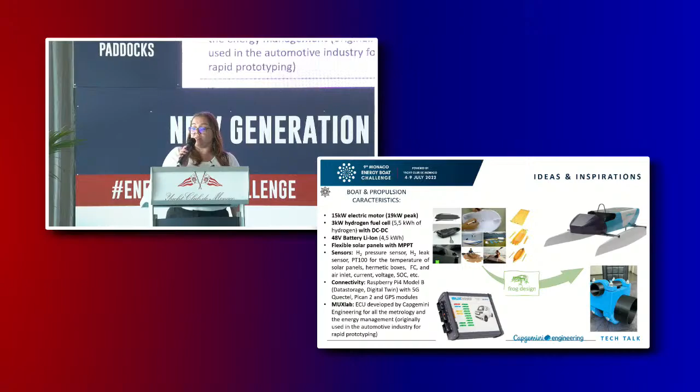So for our boat, it's the second participation like I said, so we have made some changes. The first is the electric motor - we now have 15 kilowatt electric motors homemade, and we have some lithium-ion batteries. And we have MuxLab, which is an innovative solution developed by Capgemini Engineering. The objective of this solution is to optimize the energy management of the boat and the different sources of energy, like solar panels, hydrogen fuel cells, and battery.

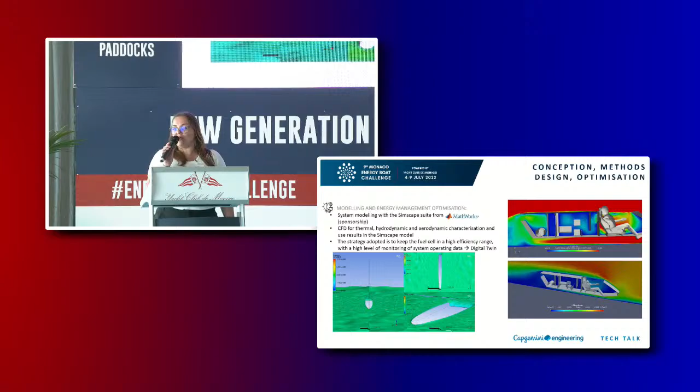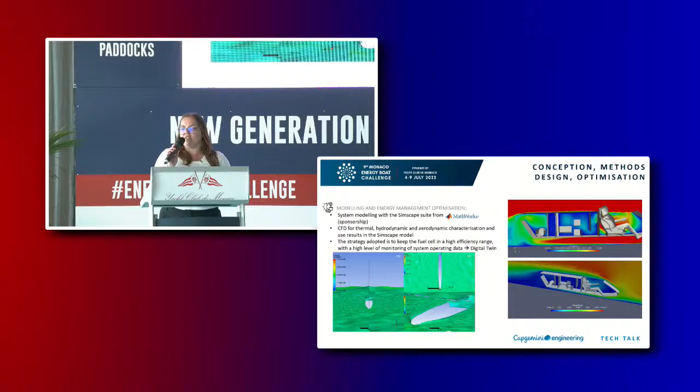So our conception is made with a base of tubular aluminum chassis, because the aluminum can be easily recyclable. And we have made some CFD thermal study to optimize the airflow for the hydrogen fuel cells. So thanks to a partnership with MathWorks, we have modeling system with the Simscape suite. And we have made a CFD for thermal, hydrodynamic, and aerodynamic characterization and used the results in the Simscape models. We have made a digital twin. The objective of this digital twin is to keep the fuel cell in a high efficiency range with a high level of monitoring of system operating data.

So about the material, it's the same as last year, but we have a change about the electric motor because it is an electric motor homemade. We have a hydrogen fuel cell like last years, and we have more lithium-ion battery. The new thing is a MuxLab computer because it is connected to a customized human machine interface and to a Raspberry. The frame is made of tubular aluminum for eco-conception, and we have covered our boat for protection against water splashes.

We have some problems with teleworking, which is difficult to work together at the same time. And we have a lot of problems about long delivery times for materials. Last year, our budget for the eco-conception of our boat was about 50,000 euros, and this year we have invested 20,000 euros for improvement of this boat.

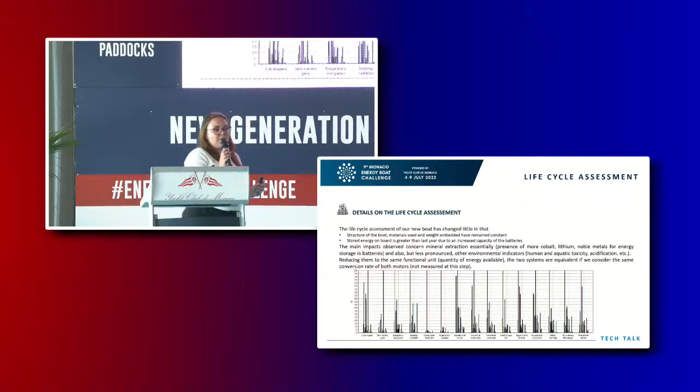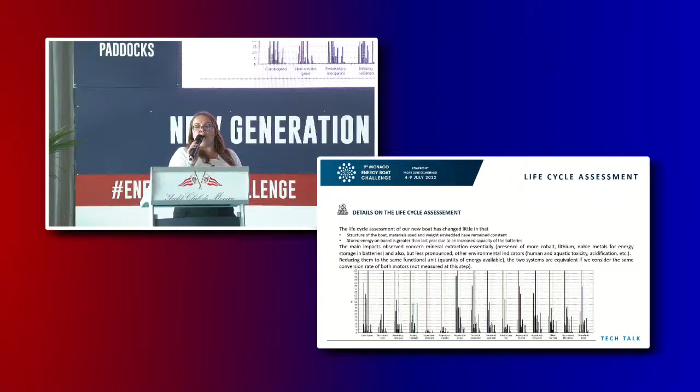So the difference from last year, there isn't much difference because we have the same setup. The change was mainly about the lithium-ion battery because we have more batteries than last year. So the main impact observed concerns mineral extraction essentially, but there are also some impacts on other environmental indicators.

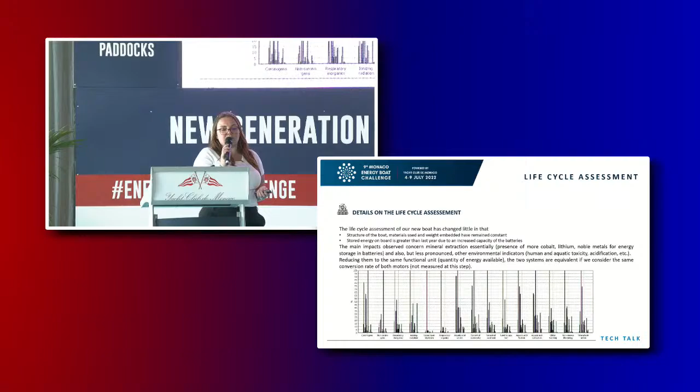So like I said, we have eco-conception and we use aluminium because aluminium can be recycled, and the tarpaulin is made of fully recyclable materials.

So one of our objectives is to develop a hydrogen propulsion chain in order to have a solution to offer our customers looking for technology to support the energy transition. Thank you for your attention.

Thank you so much. Allô, allô? Right, thank you so much. Do we have a question in the room? Ça marche pas. Please.

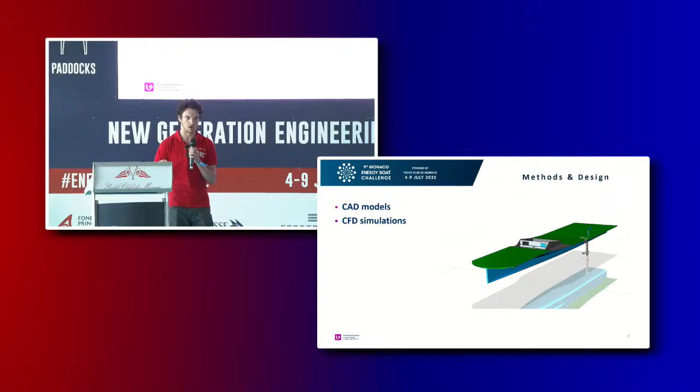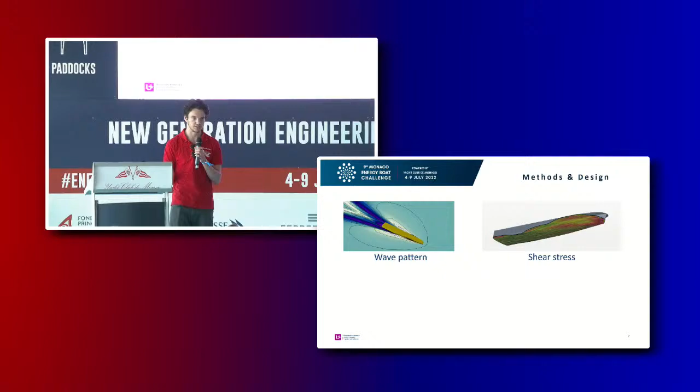Our methods and design are pretty straightforward. We make a CAD model, and then we do a CFD analysis on it to see how it would work in real life, and eventually we will test if it is the same as our simulations. In these simulations, we look at things like wave patterns, shear stress, hull pressure, and of course, we can make cool renders out of it.

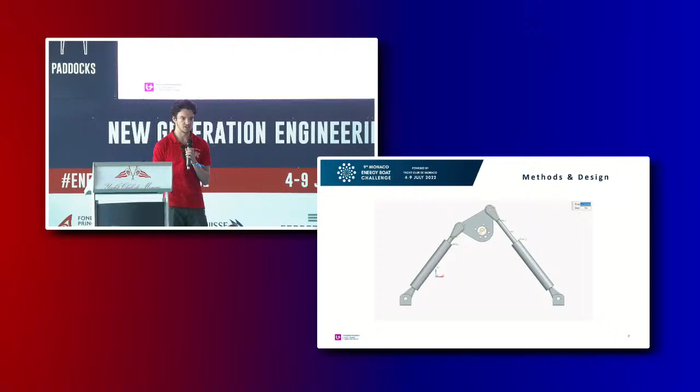Our new steering system was meant to be a hydraulic steering system, replacing our cable system because we had a lot of issues with it, with cables stretching and coming loose.

We try to make everything in-house, so our hull is made by vacuum bagging a carbon fiber composite made of a layer of carbon fiber, PVC foam, and another layer of carbon fiber. When this is finished, we take the boat out of the mold and trim the edges and finish it up. Eventually, we also made a deck with the same carbon fiber composites, which is removable, so we can work on the whole boat everywhere.

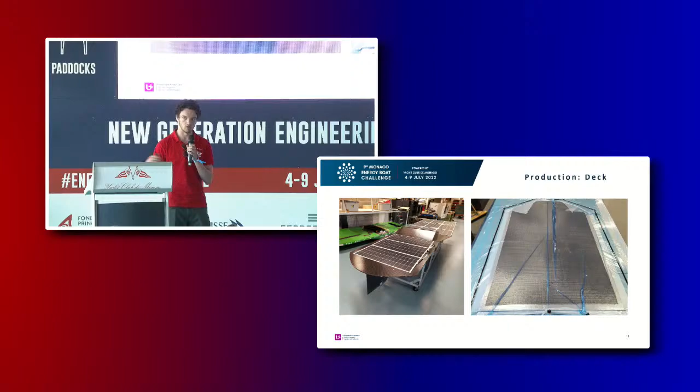Our driveline is also completely designed by ourselves. It's aluminium, special aerospace grade, so it can withstand salty seas and doesn't corrode very much. We have straight cut gears, which increases efficiency by 2%. It's a 2-to-1 ratio, so that means the 6,000 RPM motor reduces it down to 3,000 RPMs.

We have loads of different propellers which we produce in-house, each for different competitions like a sprint or endurance, so we're always at the maximum efficiency point.

Our solar panels are from Sunbeam. These are right at the maximum capacity of what's allowed, maximum area. So we have 1,440 watt peak. And these are way more efficient than our previous ones, with a solar efficiency of 24% instead of 16%.

We use a standard battery pack like everyone else with 1.5 kilowatt hours, and it's 50.4 volts.

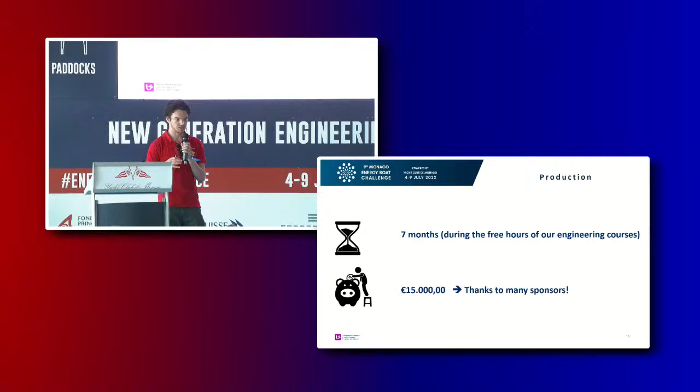This whole process of building the boat takes about 7 months, but because we also have our engineering courses, it takes almost 2 years. But the time we actually spent on it is about 7 months, and it costs around 15,000 euros to build a new boat, thanks to many sponsors who help us out, of course.

We also do stability tests. We check at different RPMs if it's also the same power you need to propel the boat, and also with different propellers if that's also the same. And then we do a trial like you would do here, with a slalom test and a sprint test.

For our life cycle assessment, we try to keep everything modular. So we have an old boat, and our complete battery pack, electronic pack, wiring loom, and drive frame are all swappable between them. So we don't need to produce a new battery pack if we produce a new boat. Also, our current battery pack is a reused battery pack from a solar car from another university, KU Leuven, who won with the solar car in Australia a few years ago.

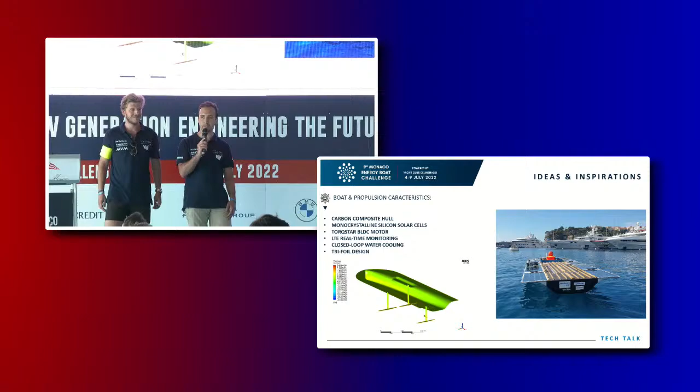To talk a little bit about the electrical side, we are using monocrystalline Solbian solar panels, around 6 square meters of them, and a Torqstar BLDC motor. We use LTE for real-time monitoring and telemetry, so we can actually view the status of the boat in real time from the shore and don't have to bother the pilot over radio to read in some data.

This year we had some new projects. First of all, we have our new propeller, designed with generative design. We had an initial model that we started with, then parameterized it, giving every aspect of the geometry. We made a simulation in CFD, then a response surface calculation, and optimized it. We repeated this cycle until we got the required result. This way we have different propellers for different races, for example a different one for the sprint and a different one for the endurance.

On the electrical side, our boat, unlike most of the other ones, doesn't yet have any CAN-based communication system on board or anything like that, and we really want to change that this year.

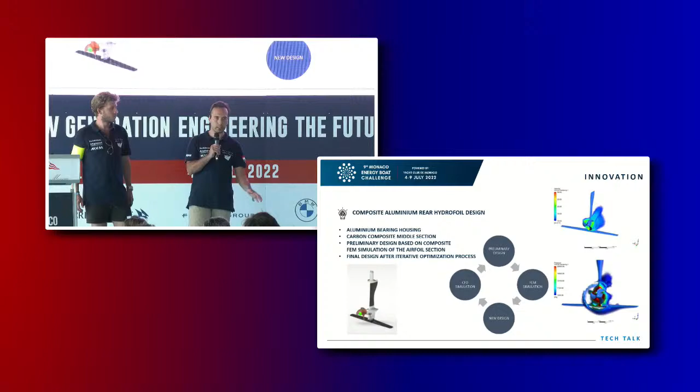The biggest project for us this year was our new rear hydrofoil design. It's a composite and aluminum hydrofoil. The cause of this design is simple: in Hungary, we are limited with some of our suppliers to manufacture it. So to speed up the milling process itself, we wanted to have something smaller to mill out. That's why it's split up into three main parts: an upper section, which connects to the boat and is milled out from aluminum completely; a middle airfoil section made of carbon fiber composites; and the lower section, because of the bearings and their tolerances, again from aluminum.

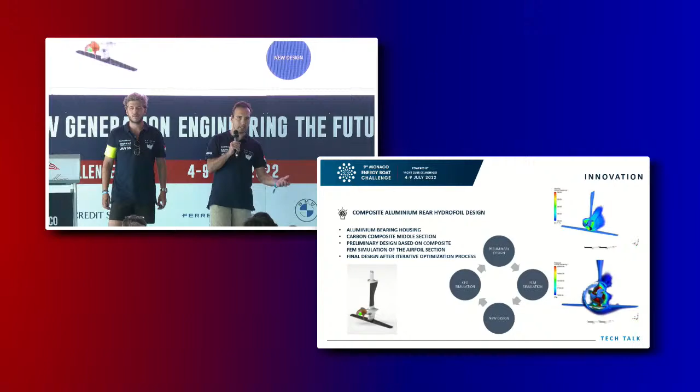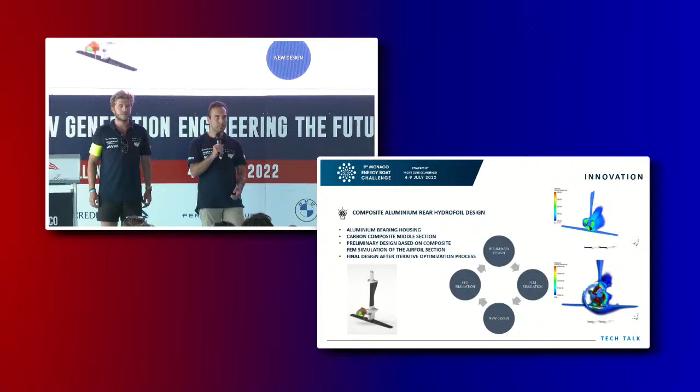To get to this solution, we made another iterative cycle. We made a preliminary design for the composite FEM simulation, then made a design for it again, then made another simulation in CFD, and then we evaluated the results. We repeated this cycle until we got the results we wanted.

Thank you for your attention. And if you've got any questions, feel free to ask.

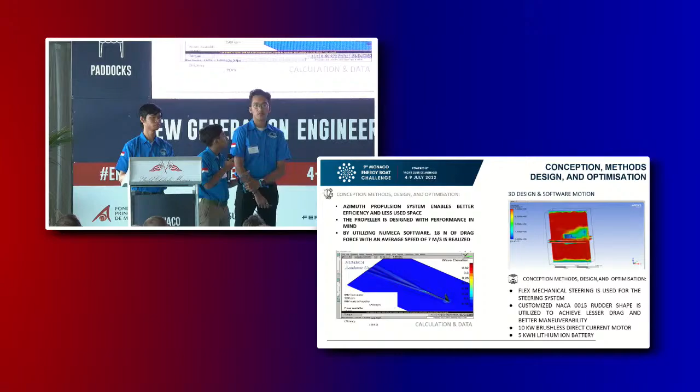Next is the conception and method for designing the mechanical system. Our boat uses the azimuth propulsion system with L-drive configuration, using a mechanical steering system because it's reliable and flexible. We use a customized NACA 0015 rudder to achieve lesser drag and better maneuverability at high speed. We use a 10 kilowatt brushless direct current motor and a 5 kilowatt-hour capacity lithium-ion battery.

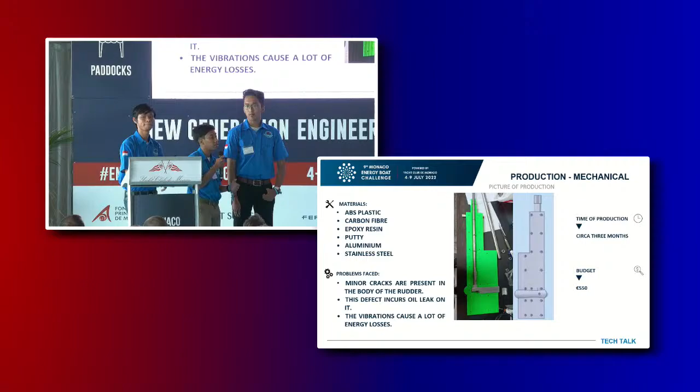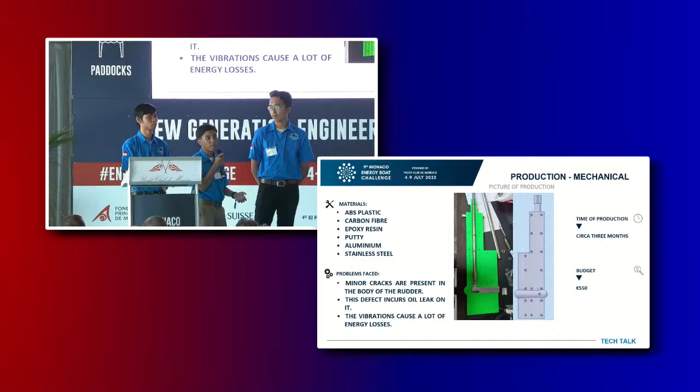This is the production part of the mechanical system. We use 3D printed ABS plastic, then cover it with composite materials such as carbon fiber, epoxy resin, and putty on the outside to smooth the surface. We use aluminum material for the tubing and housing, and for moving parts like gearing and the shaft, we use stainless steel. It took about 3 months to build this thruster with a budget of around 550 euros. The problem we face is that the reliability of the material isn't good enough to withstand the vibration of the ship.

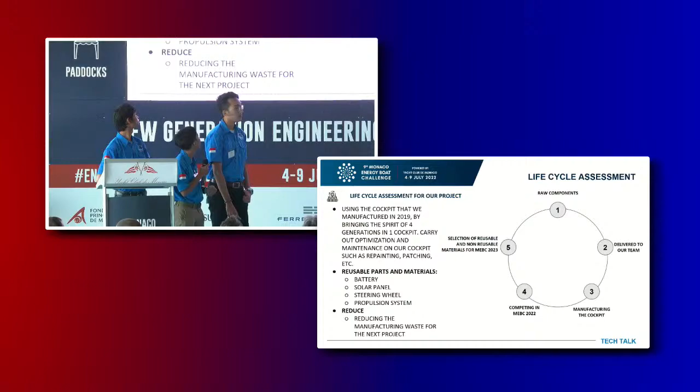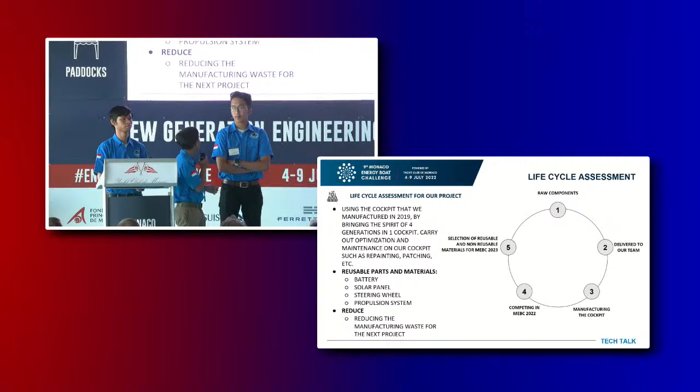And this is the life cycle assessment. So we manufactured the cockpit back in 2019. It means the cockpit has brought the 4th generation of Hydro Spirit. And then the reusable part of our boat is the battery, solar panel, and other materials.

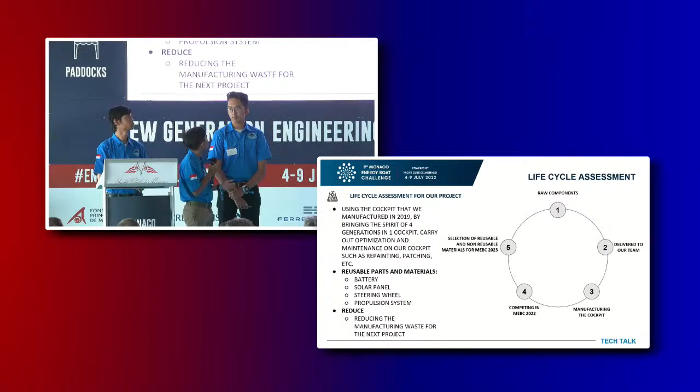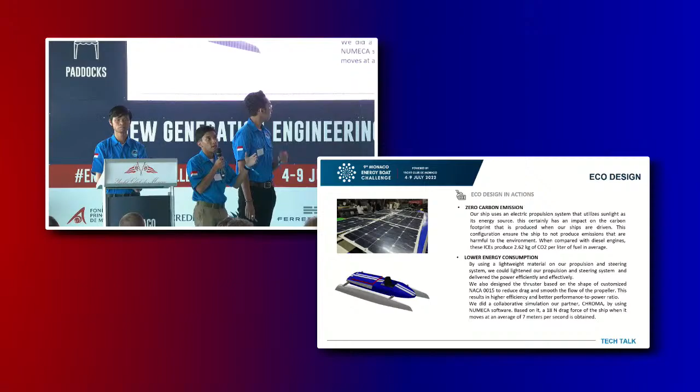When we compare to internal combustion, the internal combustion can produce about 2.62 kilogram of carbon dioxide. We achieve lower energy consumption by using lightweight material in the propulsion system and steering system, and because of that we can deliver the power to the propeller efficiently.

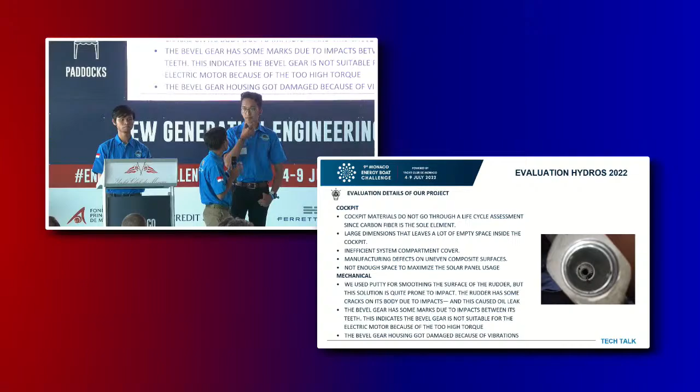And this is the evaluation for our next project. So the cockpit has no life cycle assessment, and the mechanical is unreliable material for the thruster.

All right, this is the next project for Hydros 2023. We want to make a cockpit based on the latest generation Formula E car and using biocomposite.

This is our next project. We want to use biocomposite such as flax fiber, but this is very challenging in Indonesia because there is no supplier for the biomaterial. For the mechanical itself, we would like to build our outboard system by ourselves using more reliable materials such as steel and aluminum.

Next, I want to share with Gavin. Okay, thank you for the handover, Rifki.

Currently, the electrical system of a boat consists of a couple of independent subsystems that require quite a lot of space, involve very complex wirings, and need a relatively comprehensive core system. Furthermore, a large amount of time, energy, and budget is mandatory to maintain, service, and operate the system locally.

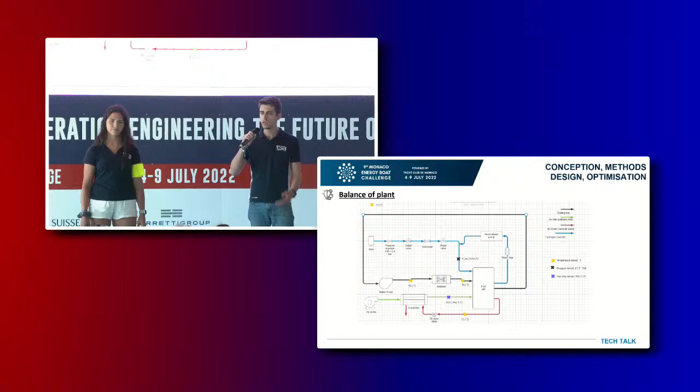This is our new balance of plant schematic. As you can see, there are new components, like there is a water trap and the humidifier. I will explain that later, but we have better results already with this new system.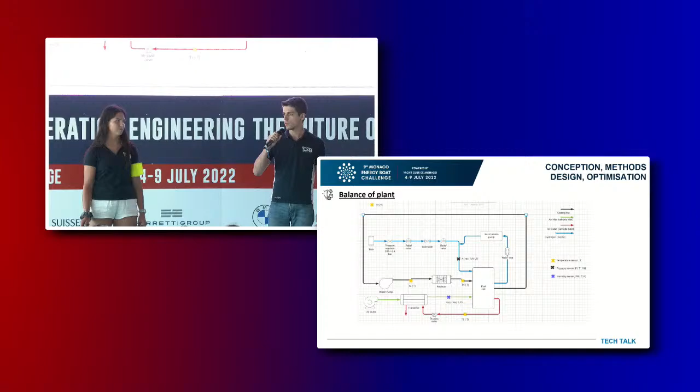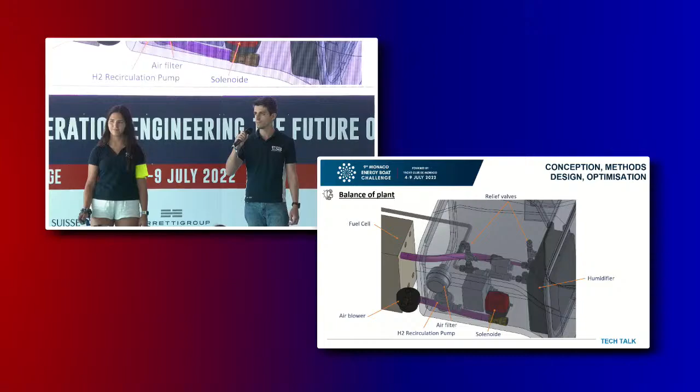So what is the purpose of the humidifier? As you know, a fuel cell's hydrogen admission has to have a humidity between 80 and 90%. So what we are using this humidifier for is using the exhaust of the air to humidify the inlet of the air. And why do we need humidity in the air inlet? Because we don't want the fuel cell to get dried out inside. Because if the membrane dries out, the efficiency decreases, and then the fuel cell overheats.

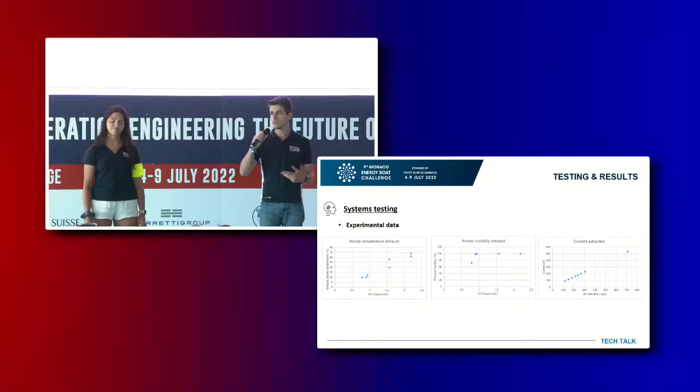Then, of course, we have to do a lot of testing. As you can see, we tested the new sensors, we tested the new radiator. We have some graphs. This was before we implemented the humidifier and the radiator, and you can see in the anode temperature exhaust, we pulled like 2 kilowatts of our 5 kilowatt fuel cell, and it was already overheating at 70 degrees. So now we expect to have better results.

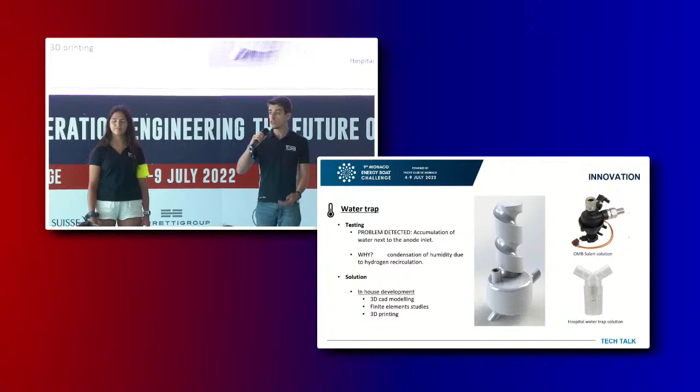So this is my favorite component, and why? Because this was all developed in-house. So I will tell you a story. As you know, most fuel cells need some kind of water trap solution because water condensates inside of the tubing.

But there are not many solutions for this. For example, we talked with a company called OMB Saleri, an Italian company. But they couldn't sponsor us because manufacturing the component for our system was very expensive. Then there are available commercial water traps, they are efficient and they do the job, but it's not an elegant solution.

So what we did, we designed our own system. In the vertical section of the structure, we have tubing passing through, and the objective of that tubing is to force the hydrogen to go a longer way so the condensation happens in that tubing. Then the water condensates, and because of the angle of the tubing, the water flows and goes to a reservoir.

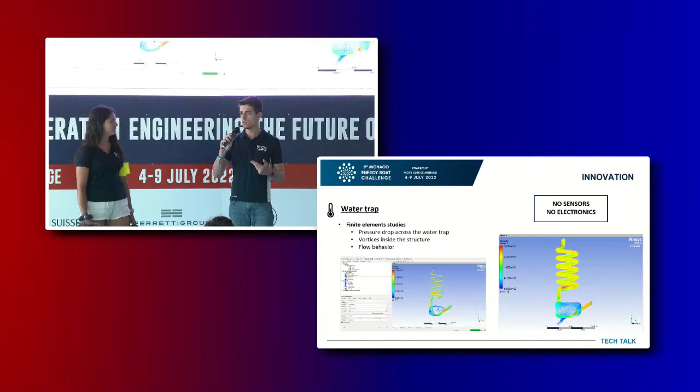And why this solution is so good, in my opinion, is it's a passive solution. There are no sensors. It's all based on our finite element studies, and I think it's a more efficient solution because there are no electronics, there is no power being used here. So it's a more efficient way of doing this type of control.

So one of the things I talked about is the problem of the water trap. In the industry, there aren't a lot of solutions. We talk a lot about the hydrogen economy, and there's a lot of funding for green hydrogen, but there isn't a lot of funding for the equipment that is needed for the applications. And that's what we are doing here.

Not only for the water trap, but for example, the humidifier. A humidifier costs around 1,300 euros. It's a lot of money for a single component. And this one was one of the difficulties of our team.

Now, regarding the life cycle assessment that we have always wanted to do to prove that our monocoque is really sustainable, we must do a comparison of what we have and what it would look like if it was made with carbon fiber and PVC core.

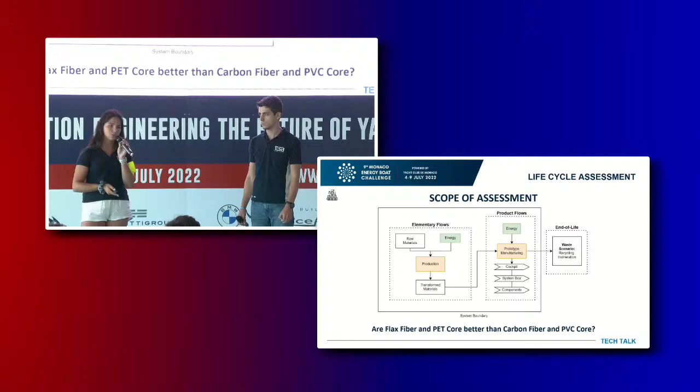While we were constructing the boats, we realized that flax fiber required twice the resin and twice the layers of fiber when compared to carbon fiber.

In this analysis, it was not taken into consideration that we used the bio-based resin from Sicomin, because in the database we couldn't find anything similar. Also, the reused mold from the Formula Student team was not taken into account here.

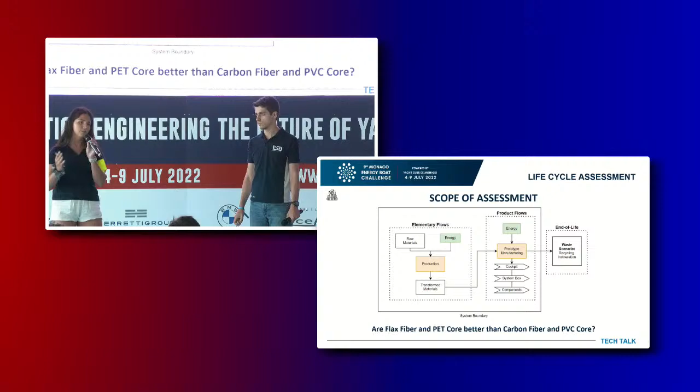We divided this into 3 parts: the system box, the cockpit, and the other components such as the seats and the headrest, for example.

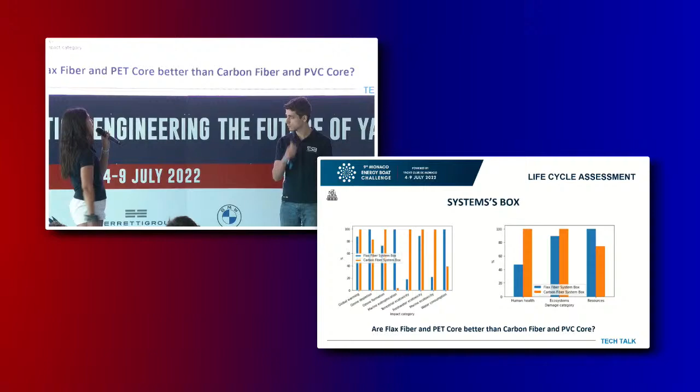So, are flax fiber and PET core sustainably better than carbon fiber and PVC core? Mostly, yes. Our biggest difficulty while doing this analysis was to find a database that had our specific materials.

We considered doing our own database, but it had a lot of complexity and data that we didn't have. So we tried to find one and make approximations to have the best analysis we could.

But we concluded that, yes, we did it — we achieved our goal to have a completely eco-friendly boat. Thank you so much for your attention.

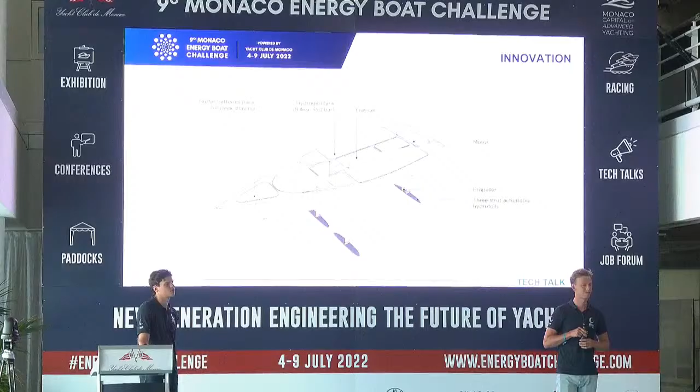Continuing this question, I know your idea designing this boat was maybe to industrialize it. So have you considered not only life cycle analysis and risk analysis, but certification? Did you follow some hydrogen certification while designing the boat?

You mean hydrogen certification, how it can be implemented at larger scale? Yes, in contact with a lot of partners we looked at these certifications and how it can be implemented. The regulations we have to oblige are the same for the whole world, the same for all companies. It easily translates to the maritime sector or other sectors, so it's not a separate rulebook for us in that case.

First of all, greetings for the amazing job. I want to ask about the way fuel cell and battery pack are integrated. Is it a passive integration, so they just connect by their different voltage and current characteristics, or is it something that can be directly controlled, so I can decide how much power to take from fuel cell and battery?

Very good question. Again, as I said, they are connected with the same bus. Just after the fuel cell we have a DC-DC converter which can scale down or scale up its voltage, making sure the batteries are charged, or the buffer and motor get the correct output voltage to operate at peak performance. It's quite a fluent transition, and we can just ask the fuel cell to generate more power, it will speed up, or lower its power, speed down, depending on the state of charge of the buffer or the request of the motor.

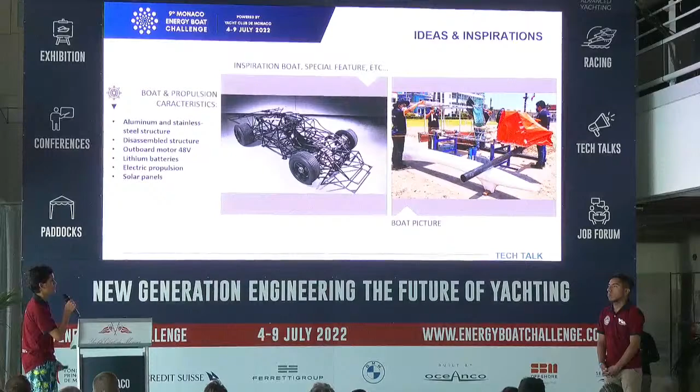The boat and propulsion characteristics we have: our structure is mainly composed of aluminum and stainless steel. It is a disassembled structure, and we have an outboard motor of 48 volts. We've used lithium batteries, but we have an issue with that - we could talk about that later. We've used electric propulsion, and we planned to use solar panels.

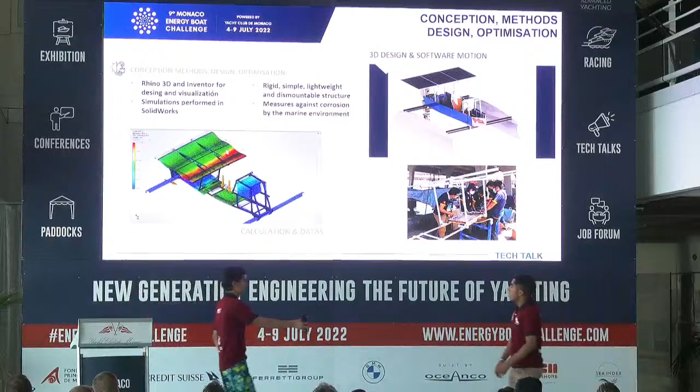About the concept, methods, design, and optimization: we used some software, especially software like Inventor, Maxsurf, Rhino, etc. In this case, we can see our structure, which is stainless steel and aluminum. We used, in this case, just SolidWorks and Inventor.

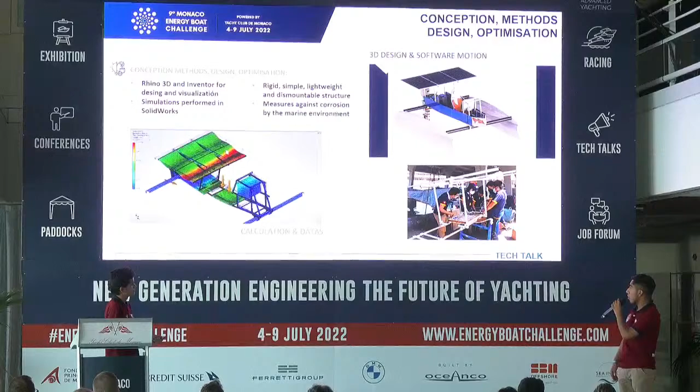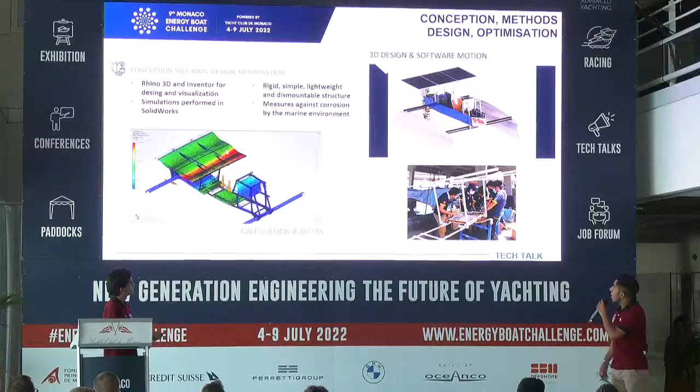Well, also we have a rendering of our design, and we can see the construction, which takes place in the marina of our country, because our university doesn't have a special place to make these kinds of things. I mean, we have some laboratories, but when I say we don't have this place, I mean some place with a lot of water, like a lake, or maybe a beach, or the sea.

But we have some laboratories where we used to do things like soldering, welding, some kinds of manufacturing like this. We found some problems with the structure, the transport planning, and obviously the COVID-19. About the budget, we are near 15,000 euros, and the time of production was a little more than 8 months - near to 1 year.

As I mentioned, the problems we faced, apart from those - when we arrived, we got the bad news that our batteries weren't able to come with us. So the moment we were in Nice, the place where we arrived when we came from Peru, we started to look everywhere for a way that we could get another battery with the same or near characteristics that we had. Unfortunately, we didn't find the same one. We planned to use two of them, but we just had one.

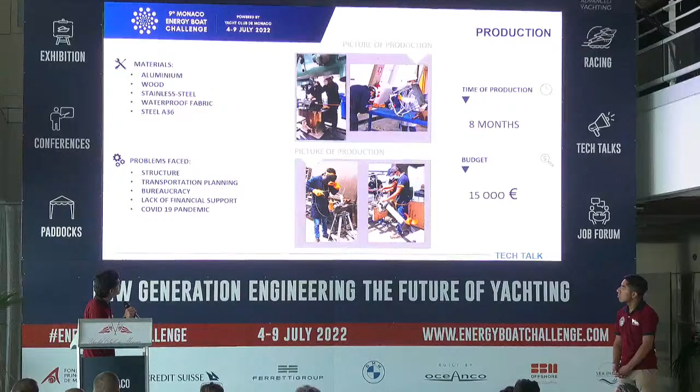About the testing results, because the budget in research competition is always present, the conditions of testing and measurement that we had were the strength of each material of the boat, which we've constructed our structure, our directional system, the load we were capable of, our capacity of load was 245 kilograms, and the hulls we used to test were of a lower capacity.

As you can see in the picture, if you look closely, they are submerged because they are of a smaller size than the Monaco would give us. Also, the separation between the hulls was shorter, which limited our maneuverability and velocity. But in the end, our cockpit is solid enough, our manual directional system works as well, and we managed to determine the maximum speed under these limitations, which was around 11 knots, about 20 kilometers per hour.

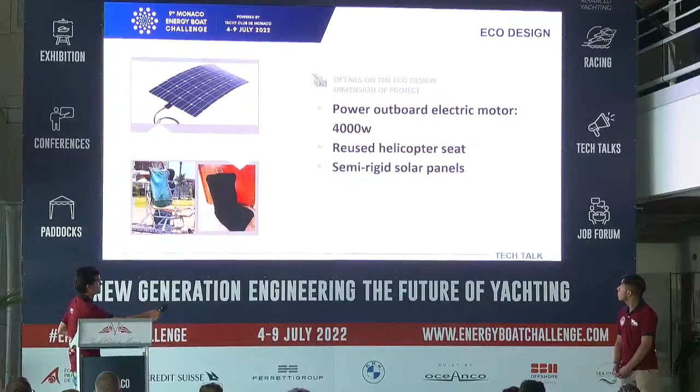Previously a little more about the velocity that my friend mentioned. We were just near 11 knots because we don't have the suitable hulls.

But about the eco design, we used a recycled or reused seat that was actually used for a helicopter. It was a donation. And also the semi-rigid solar panels that include clean energy, and the power outboard electric motor. Maybe it's obvious to use this kind of energy, but in our country it's a little strange. If you look around our country, you usually see engines, outboards. So that's it.

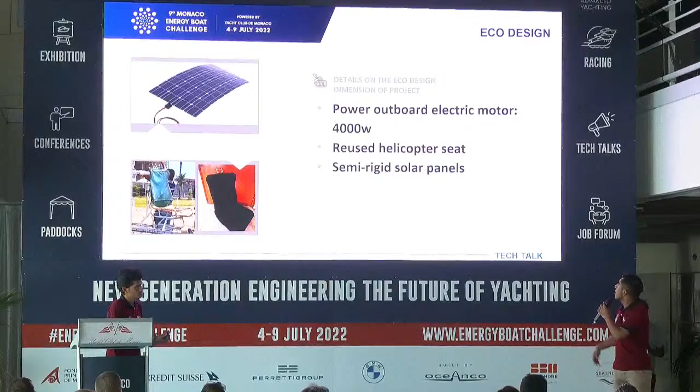About the innovation, it has a relationship with that idea, because if I said we use an electric motor in Europe or maybe the United States, it's so natural, but in our country it's very strange.

Also, the design of a photovoltaic system with the implementation of flexible solar panels, because at the beginning we tried to design something very complicated, but in the middle of the project we noticed this required more budget, and we decided to change that idea. At that moment we had the flexible solar panels, and some months ago we had to buy the semi-rigid solar panels.

Finally, for the industrialization of this project, as we've mentioned, we don't have too much innovation compared to what other teams have presented, but in our country this is very rare, and because of that we've managed to catch the attention of some interesting organizations who have lent us a hand. For example, the National School of the Peruvian Navy, the Peruvian Canoeing Federation, and the Marine Industrial Service called SIMA in Peru. Those three gave us a place to make our trials for our engines, structure, panels, and batteries, all assembled, even though we had some limitations.

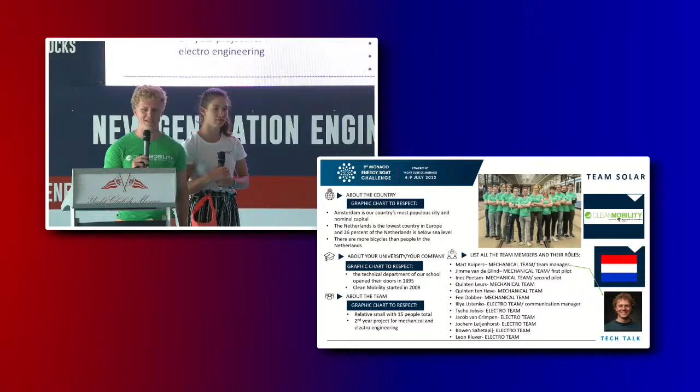So we're from Amsterdam. Amsterdam is the most populous city of the Netherlands and the nominal capital. Like mentioned before, the Netherlands is the lowest country in Europe, with 26% of it below sea level. Due to that there's a lot of water in Holland, so it's really a good place to have a boat and test it. That's why we're here with a lot of Dutch teams.

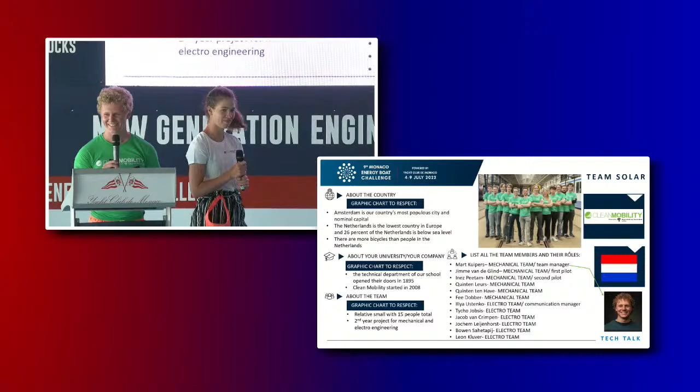Something about our university: the first time our school opened its doors was in 1895. Clean Mobility, the group we're working for, started in 2008. Something about our team: we're relatively small, 15 people. Our project is a second year project for mechanical and electrical engineering students. This is a list of all the team members and what roles they have.

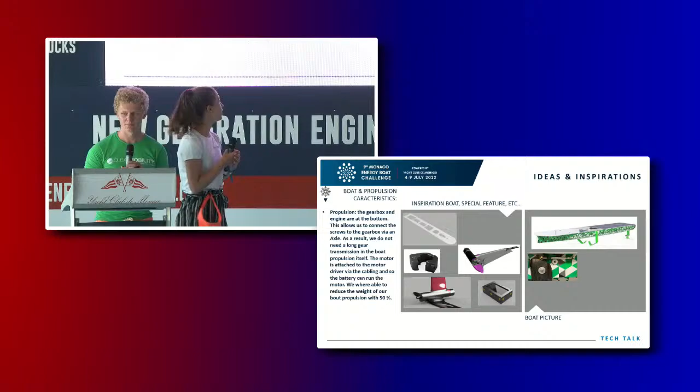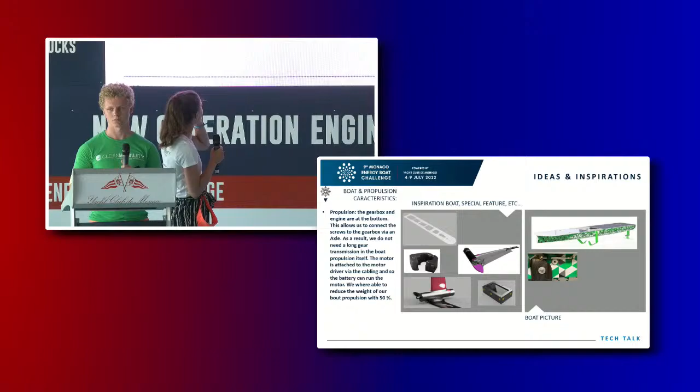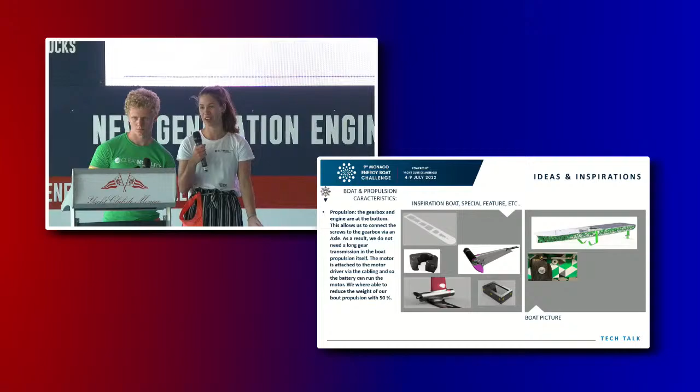Now we're going to talk about the propulsion. We have a different propulsion from the rest of the teams. Our motor is underwater with the gearbox attached to it. With the cables in the propulsion itself, the screws go round, so that's how it works. The motor is downstairs and not up in the boat.

In general, engineers work with a very typical 7-step plan. As mentioned in our presentation: firstly, define the problem; secondly, gather information; thirdly, identify possible solutions; first phase prototype; testing phase; refine and find a product.

In our case, it was testing our old boat. Our boat is built over 2 years, so the first year they completely built the boat. There were a lot of things that could be just a bit better. So we tested the boat, analyzed the data, made some conclusions, and integrated all the new information into our new boat and its improvements.

We made the boat over 2 years, as he said before, out of carbon fiber. It's the best material you can make a boat out of, among other materials other teams mentioned, so it's the same as every team. Our budget is 15,000 euros, and we do it. Every year a new team comes, and we're the team this year.

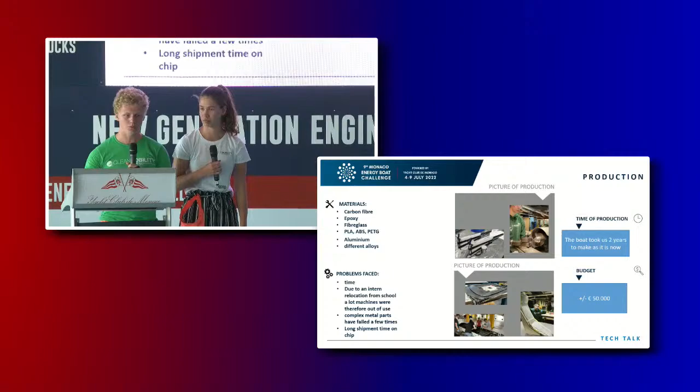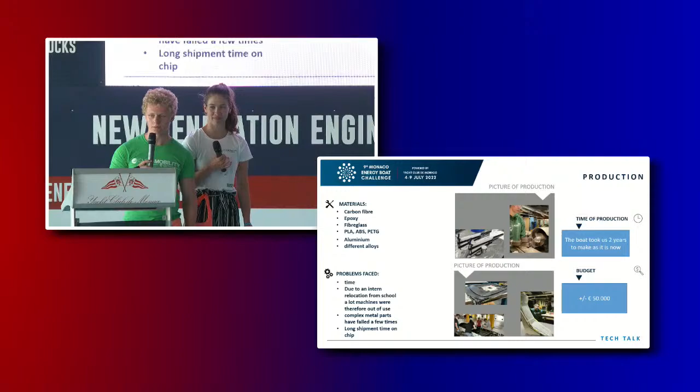Our main goal for the project is to have a boat that is mainly for long distance use. We use a lot of plastic materials because they're really lightweight - like PLA, ABS, PETG for the 3D printer.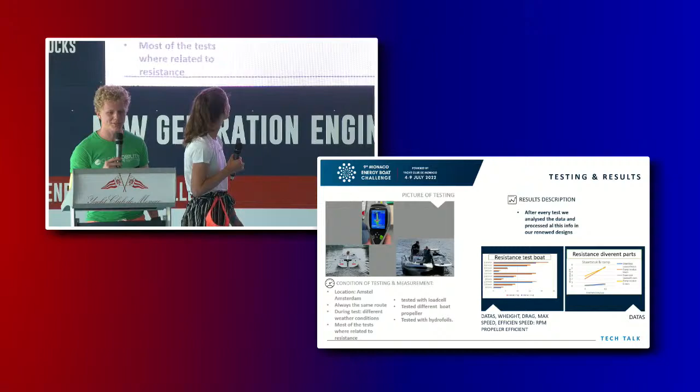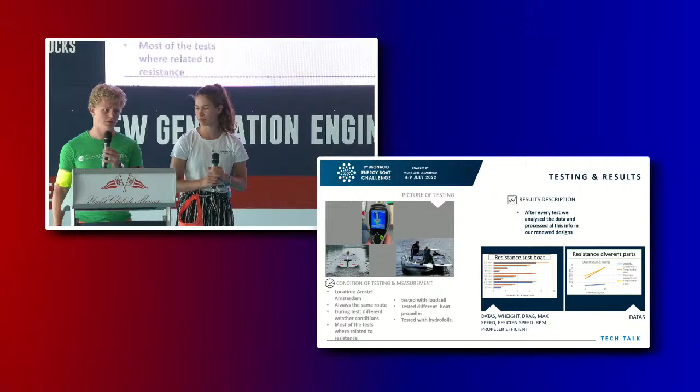Testing: the location where we always test is the Amstel in Amsterdam, the most common and main river in Amsterdam. Mainly we tested our propulsion, especially our new propulsion from this year, and our hydrofoils, with a lot of different setups for our screws for different kinds of speeds.

We began our project in 2008, and since 2012 we've made 3 different boats. Now it's the 3rd boat, and it's the best boat because it's lightweight - we reduced the weight by 50%. The last boat was really big, like a strong horse.

So we just wanted to improve by using different kinds of materials. We also had internal switches with teachers, so a lot of new eyes with new ideas. We reinvented our boat completely.

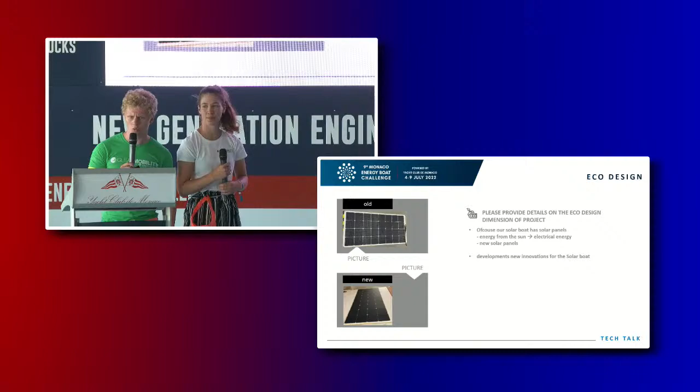Also, one of the big changes this year was a new deck. On the deck we installed new solar panels - this is a photo of our new solar panels.

At least we invented a lot of things: hydrofoils, a boat propulsion, a bin for the electronic parts, boat propellers, a cockpit, a new boat driver who's not in the boat yet but is coming, and a data logger.

Things like our hydrofoils - about the boat propulsion, a lot of other teams use metal materials for their propulsions. We use composites for it, just because we wanted to look all the way around, be creative, and search for new possibilities in that case.

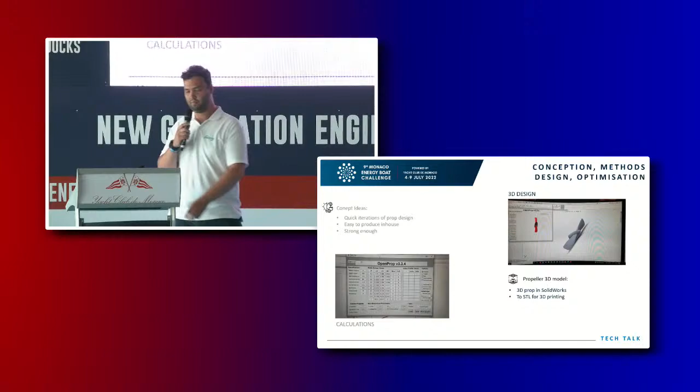From these designs, we can go really fast from OpenProp into SolidWorks 3D, which we have the propeller right here in the top corner, in 3D. And with SolidWorks, we can easily make a negative mold out of this propeller, which we can use in a 3D printer to quickly print a 3D mold.

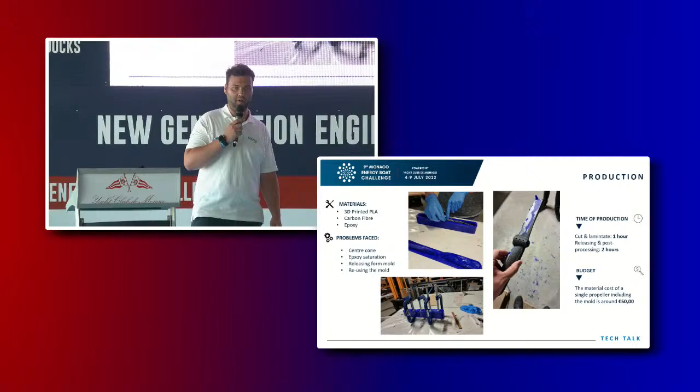You can see the production process right here. As you can see, we have the 3D mold here, and we use carbon fiber and 3D printed PLA for the mold, and we use carbon fiber to make the propeller. After that, we infuse it with epoxy and let it rest for a moment, and then eventually it becomes a propeller.

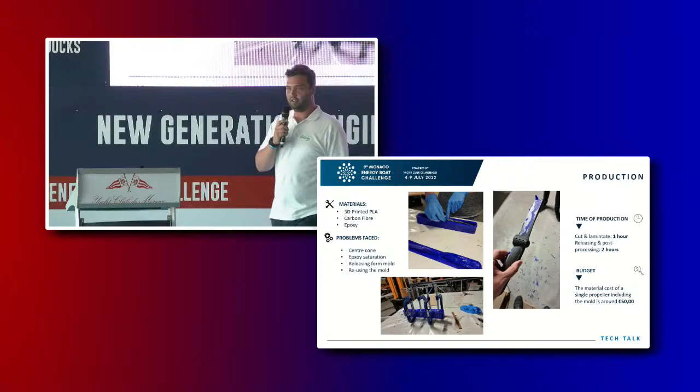A few problems we faced here was getting the center cone, which is the piece right in the middle of the prop with the 3 holes in there, to get it fully saturated with carbon fiber and also with epoxy. That was a very big problem we had in the beginning. Also the problem was epoxy saturation throughout the whole propeller, so throughout the blades, in the center cone, everywhere.

And releasing it from the mold was also a problem. Right now we still have to sacrifice the mold to get the propeller, but we plan on designing a mold which can be reused time to time to create the same propeller again.

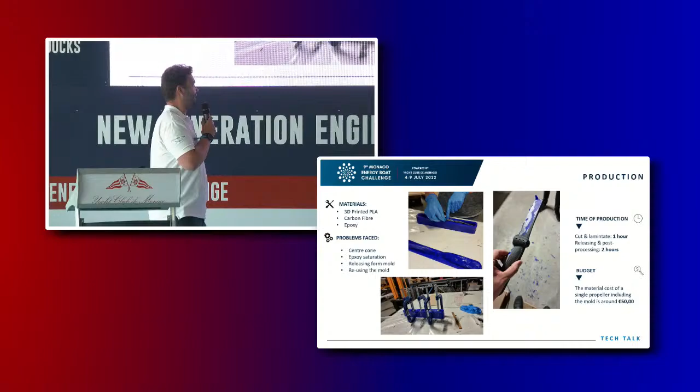So now comes the good part. Time of production for this propeller is around 1 hour to cut the carbon fabric and to laminate it. And after it's hardened, we need around 2 hours to release it from the mold and to post-process.

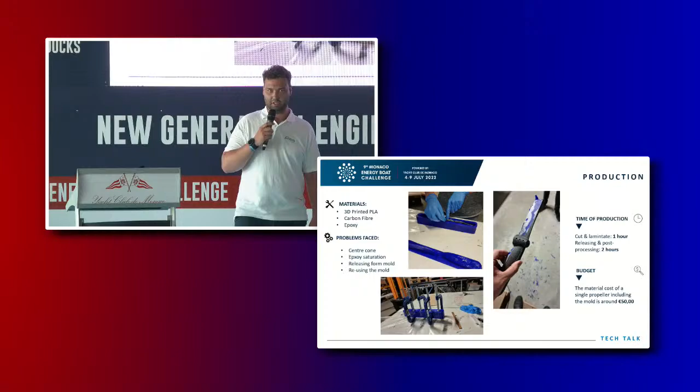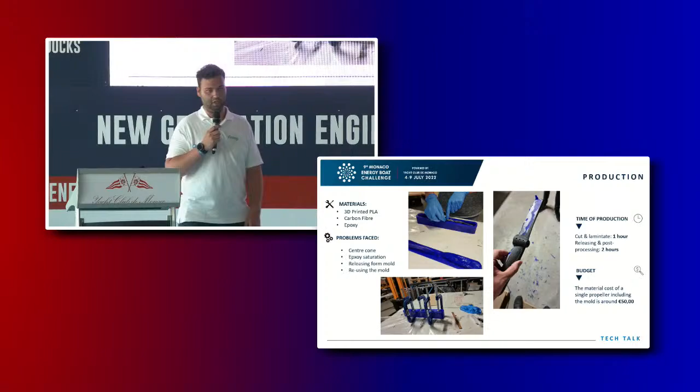So if we have to do this with an aluminum propeller in a milling machine, it would cost way more time and way more money. As you can see here, we spent around 50 euros including the mold and the propeller cost, which is carbon fiber and epoxy. And for a milled aluminum propeller, that would be around 400 euros. So we save a lot here.

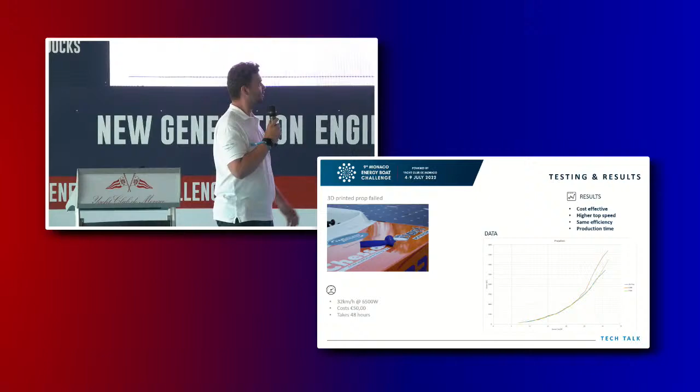And you can see 2 different carbon fiber propellers which we made last year, the orange and the green one. The orange one is actually a little higher in power usage, but it also gets the top speed we wanted, which is around 32 kilometers an hour at 6,500 watts. So that was a little bit less efficient.

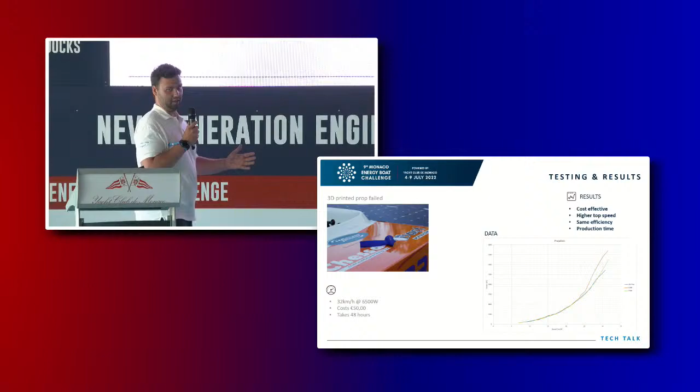So yeah, the main result here is that we can get a propeller for 50 euros. We can make it ourselves in-house, and it takes about 48 hours with the hardening of the epoxy in it.

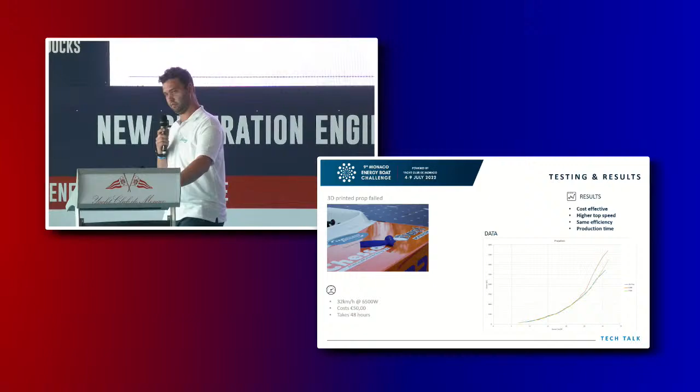So, planned improvements for next year: what we would like to do is get the boat on hydrofoils, which is our main goal. And also for the propeller, what we want to do is make contra-rotating propellers. And yeah, that's about it.

So, thank you all. Some questions?

Yes, we have one question. What was the fire today? That was coming, yes, okay.

So we had a little bit of a problem with our charge distribution. We have a small charging cable running from back to forth, which came loose from the deck and was laying on the floor of the boat, and water came into the boat. So it was actually a short from the battery charge, which went into burning, resulting in burning in the charge distribution. Yeah, it's very unfortunate, but we already managed to fix it.

So, yeah, we hope to be out on the water tomorrow. That was my next question. If someone has another question?

The dinner tonight is good. Have a good night. Thanks to all of you. Thank you and congratulations. Thank you.